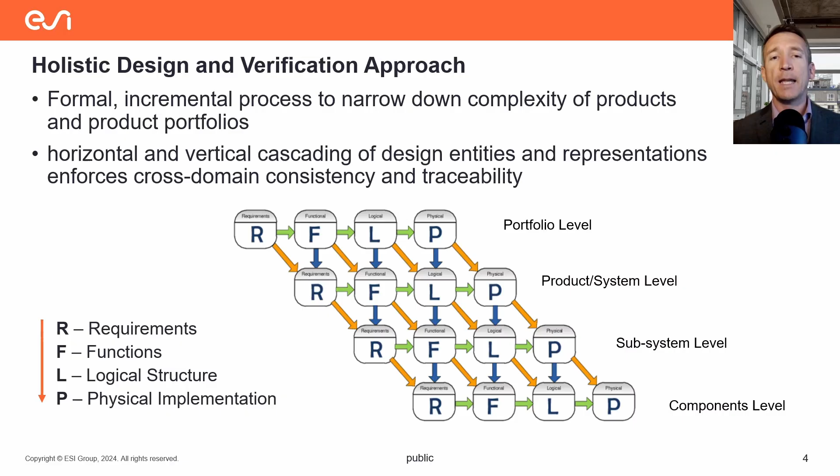There's also a vertical flow of information. For instance, the physical layout of the portfolio level drives the logical description of the product. It allows us to drive requirements on the next level. So there's tight integration between these different entity layers, and this should be enabled by the holistic integration approach. So how can we achieve digital continuity along this process?

This allows front-end or back-end tools to be replaced with alternatives. But the API that is connecting the front and back end stays the same. There's no change in the integration layer. So from that perspective, we are tool agnostic and easy to adapt with low maintenance costs. This is the approach that ESI has implemented for the integration of development processes for these complex systems. A demonstration of this is shown in the next section.

The background for this example is of a commercial electric vehicle, that is, a semi-truck for perishable goods. This is a very high-level description of the stakeholder needs. We want to be able to carry a meaningful payload, and we want to fulfill relevant certifications. In this example, there are two decisions at the architectural level. The first is about the power source, either a battery or a fuel cell, and the second is about the cabin heating. It will either be a heat pump or it will use resistive heating.

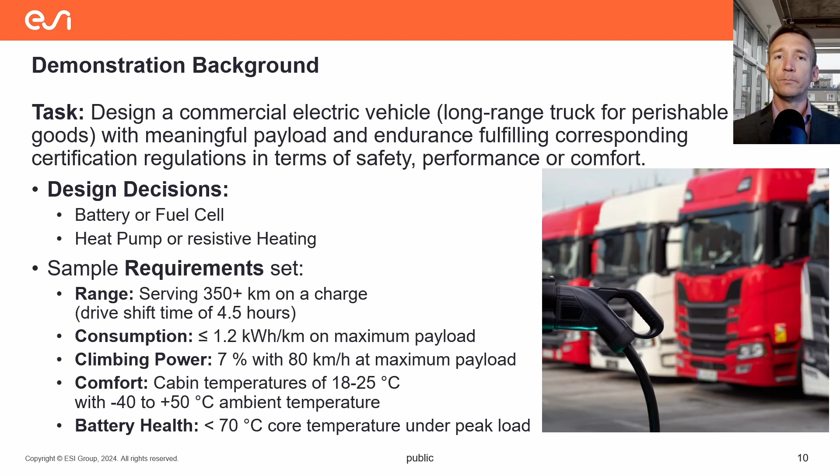So the process which we go through is covering the left part of the V cycle, the design and verification phase. We start from the requirements in a certain tool, and based on these high-level requirements, the system architecture is designed, which is more or less a formal process where the functions of the system are defined and the logical architecture is derived from the functional analysis.

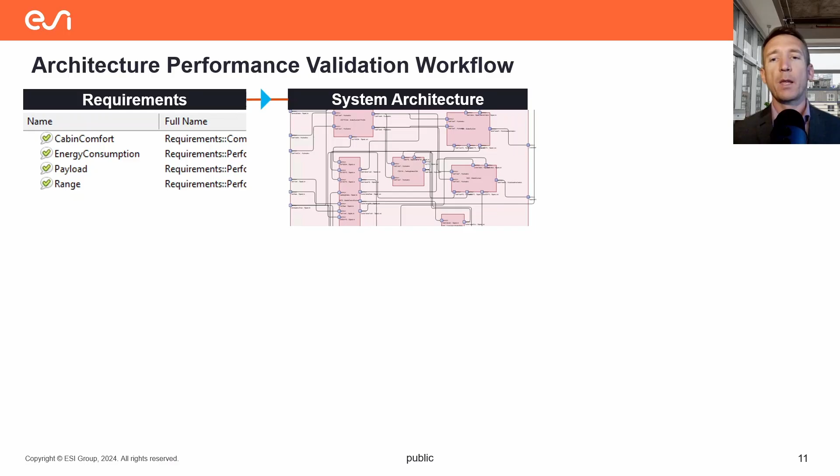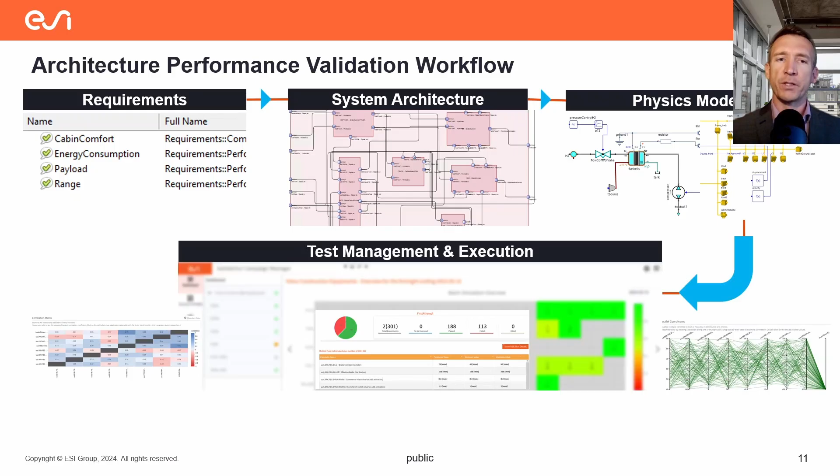And then we reuse this information on the system architecture and also the requirements to automatically build simulation model templates. So we transfer the information from these system models to the simulation domain, and we augment them with simulation and evaluation that represent the scenarios described by these requirements. And then we can use these models to run verification simulations in order to find out if the architecture fulfills the requirements. There are four core aspects that we transfer from the holistic system model to the simulation domain.

The first one is the architecture itself, the logical structure, that is, the components and their relations. To do this, we use stereotyping, which is a feature in SysML where we extend the information of the structure in the SysML diagrams to include the physical domain behind it, so that we can create physical simulation model templates automatically based on that information.

And then we fill these components with behavioral components from the physical model libraries. Or we use functional mockup units, or FMUs, if these models are already existing.

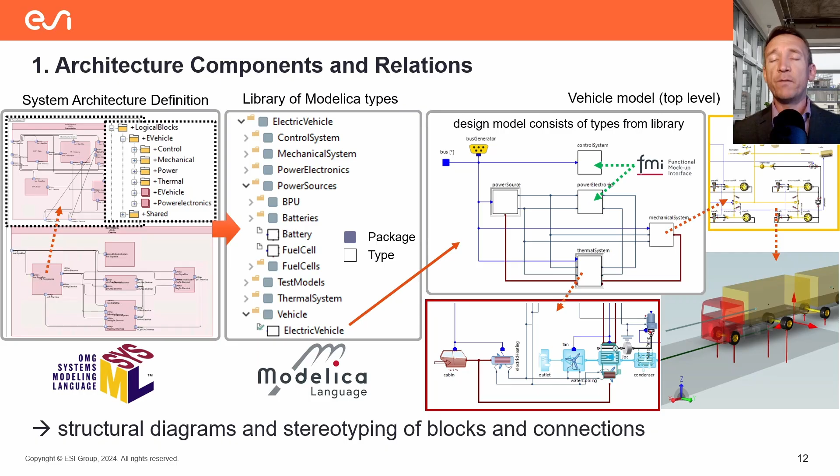The second aspect we transfer is the design parameters from the system model. Many design parameters are already defined at the architectural level. There are parameters that are attached to certain logical components in the system model, and we automatically extract and transfer this information to our simulation model templates. And these parameters are automatically allocated to the various components. And these parameters then are also available in the test management platform.

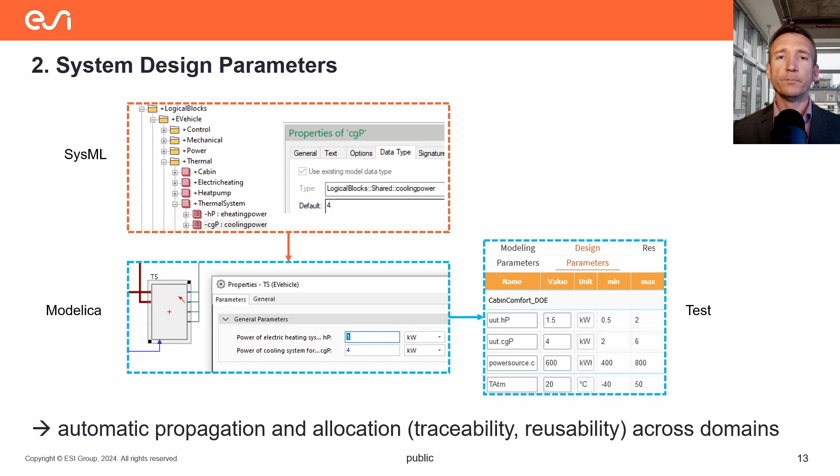The third aspect is the topic of configurations. How to represent variants and configurations. We use the information about variability. For example, if a component in the architecture is flexible or variable, then this information is transferred, and we use for the implementation of the variability the replaceable model syntax from Modelica.

Also, we extract the information about configurations, which is represented in SysML variability diagrams, a new feature in the SysML 2.0 specification, which was recently released. Based on this information in the system model, we extract or create a specific configuration of the system.

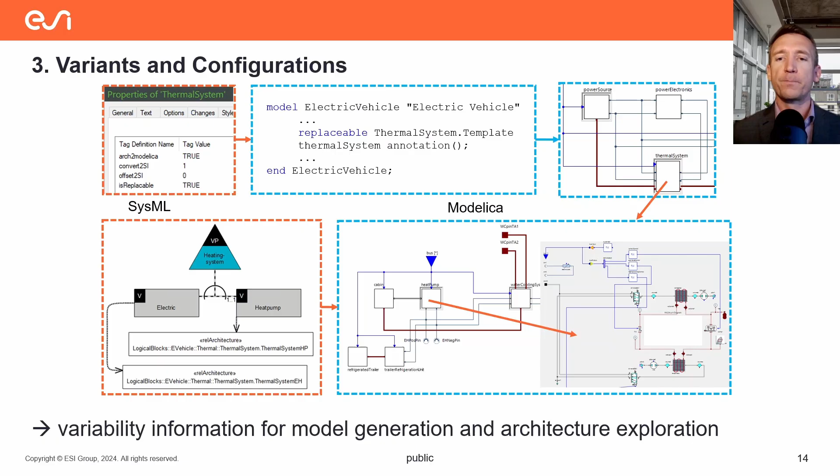The last aspect that we reuse from the system model is test model generation. This is also contained in the requirement diagrams, where we have a linkage between the requirements, functions, and logical diagram. This is used in the simulation for a function-based test approach, so that the engineer is just selecting part of the architecture by function, because the teams are usually allocated by function.

So the engineer that's doing the simulation model is not overwhelmed by the full architecture, but can select the function that he is allocated to, and only gets the components that are connected to that particular function. The extracted test models are augmented with scenarios to verify the requirements.

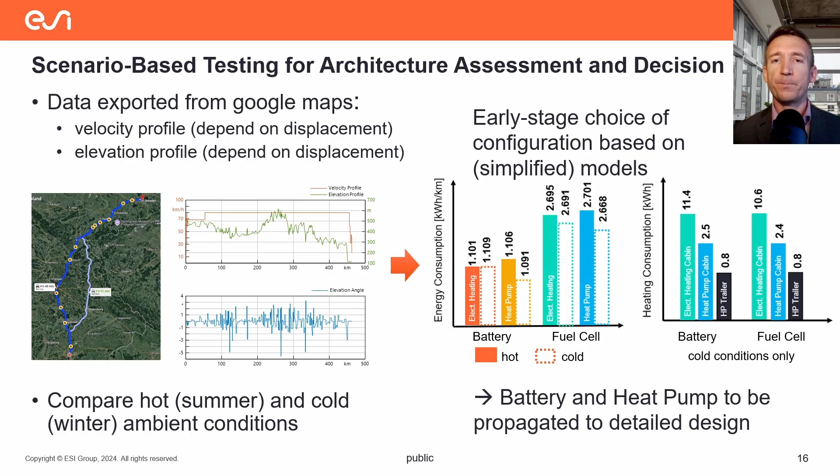And we also see that the heat pump architectural choice consumes less energy for the cabin heating. It also provides the benefit that we can cool the cabin. Taking this into account, we have a decision for a configuration, a battery, and a heat pump. And now we can do a more detailed design of the system.

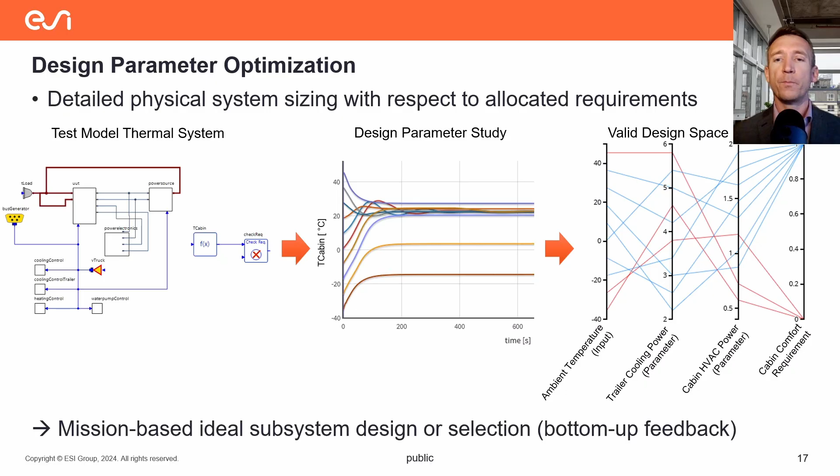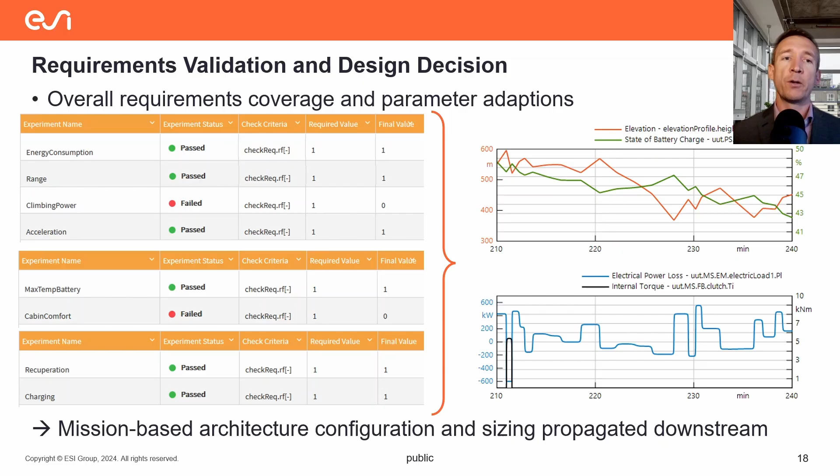This slide gives us an overview of the overall requirements view within the Validation Campaign Manager. We see that 6 out of the 8 requirements are fulfilled. So now we would have to go back and look at the design parameters that affect the 2 requirements that are not fulfilled, and also check how they affect others.

Let's conclude with some takeaways. We've achieved digital continuity by validating and verifying the architectural design at a very early stage when simulation is often not yet taking place at all, even though it really makes sense to use simulation at this early stage, as many expensive decisions are being made.

We've created a tool-agnostic approach based on linked data. No duplication of data. Instead, there's a single source of truth. And the user's not bound to an all-in-one monolithic solution.